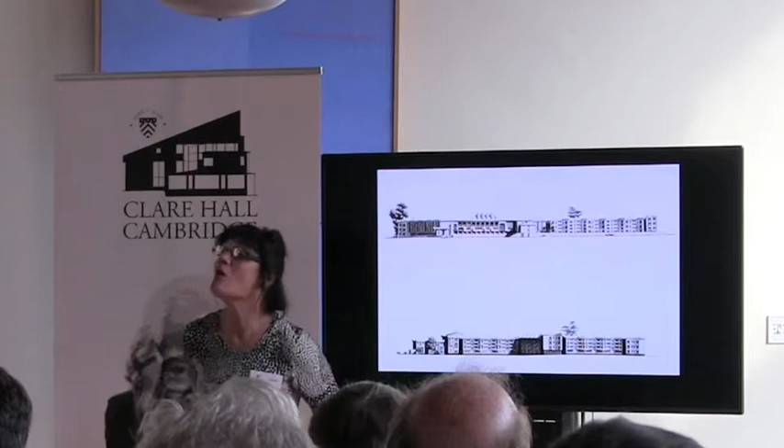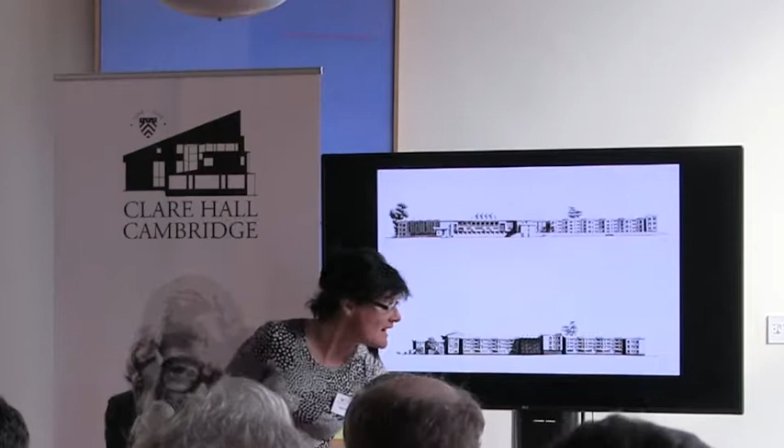This is where modern architecture starts, I think. More telling, perhaps, was the scheme that came second, by Howell, Killick, Partridge and Amis, a real success for a very young British practice, which led to them getting further work. Here's a better view of the project.

The island was supposed to have Winston Churchill's tomb on it. An ice skating pond was part of the brief, so water becomes important. This leads to work for HKPA at St Anne's in Oxford and at Birmingham, where the red brick universities were expanding very rapidly, trying to even up the balance between the provinces, London, and Oxford and Cambridge.

61-2. Other competition entrants were Chamberlin, Powell and Bon, who worked at New Hall, now Murray Edwards, and did a huge campus at Leeds that made it the biggest university of the 60s and 70s. And Denys Lasdun, who Martin later recommended to work at the University of East Anglia.

So where does that leave graduates? Moments of facts number 2 and last: the academic staff who were not fellows at Cambridge were 45% of the academic staff by 1961-2, unattached to a hall, and 916 research students unattached to a college.

The Bridges Syndicate in 1960-62 recommended building University Centre, 1964-7, by Howell, Killick, Partridge and Amis. Meanwhile, the university builds Wolfson, University College, now Wolfson College, for which you'll be pleased to know I don't have a picture. And it's so horrible.

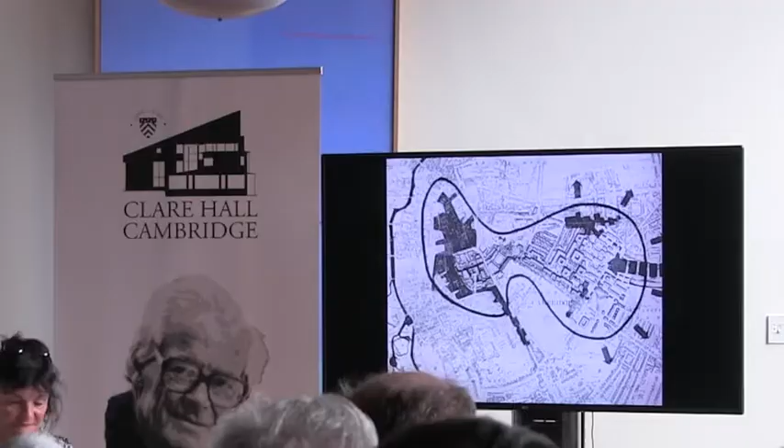Well, to begin with, a bit of necessary background. Ralph was born in 1914 in Mill Hill, a suburb of London, in a middle-class family with Scottish roots. Both his parents were Quakers, and in due order they put Ralph into a Quaker school. As you well know, Quakers have no priests. They just sit down silently praying and contemplating, whereupon one of them interprets the feeling of the meeting, and that's it. Ralph, I believe, early developed a talent for that interpreter role and practiced it during his whole life and career. Early at school, he met his future wife, Ruth.

Ralph went to Northern Polytechnics in London to study architecture, graduated in 1937, and started to work for a well-established firm. The name is forgotten, but he only found out that that wasn't his future.

So he took off to Sweden, where things in these days were happening both in architecture and in politics. He did it by bike, spring 1939. This was half a year after Mr. Chamberlain proudly had declared peace in our time after meeting Hitler in Munich. Mr. Chamberlain, as we well know, proved wrong. Ralph, with his Quaker background, contemplated joining some kind of ambulance brigade, but was, after consultation with his former teacher, advised not to, and to stay put in Sweden instead. Ruth went over by train.

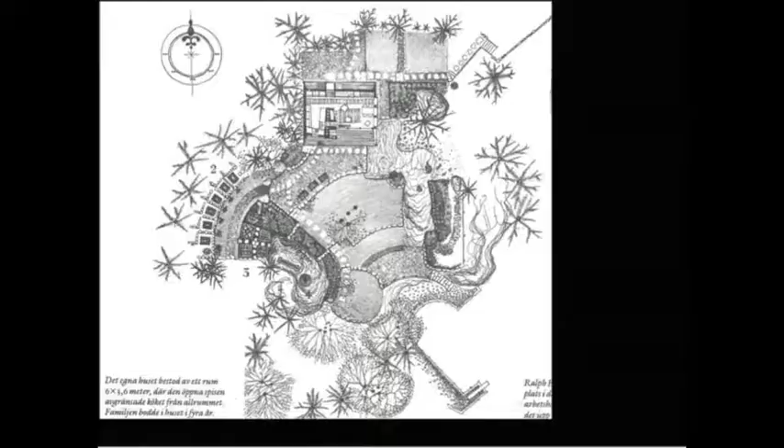Ralph went by bike or ski some kilometers through the forest to the train station, then took the train to Stockholm and the Royal Academy of Fine Arts, section architecture. There he made, for his future, very valuable contacts with both Swedish and foreign colleagues.

The original hut, named the box, is no more, but a perfect replica was built about 40 years later near his new home in Drottningholm. From that you have a view over the open fields and all the way to the medieval church and its churchyard, where Ralph and Ruth now are resting.

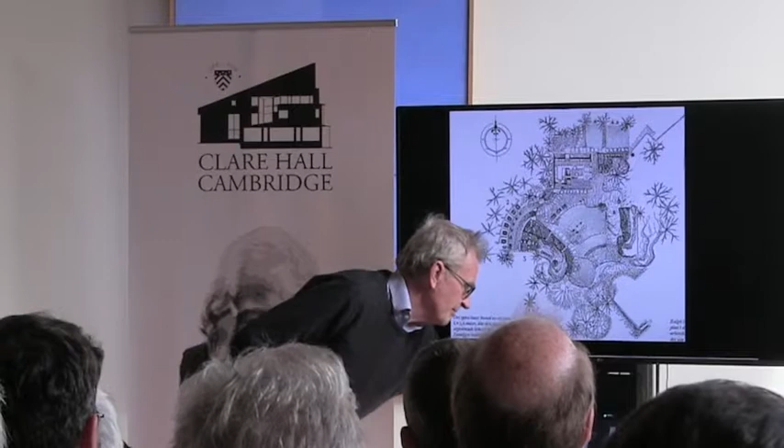It was Anders Tengbom. He remained a close friend in all of Ralph's life, and they met at the academy. He helped Ralph and Ruth to their new home in Drottningholm because the box became too cramped. They managed to rent the upper floor of a wooden house with a veranda, and there he established a small practice.

With the help of Anders, he also got his first commissions, doing some additions, doing a series of small industrial communities in mid-Sweden. He also came to design Europe's first indoor shopping centre, up in Luleå in the 50s. But there were several of these very nice projects still alive and very livable in mid-Sweden - that's the forest version.

But now the veranda wasn't big enough, which made Ralph do yet another unconventional investment. He bought Verona, a 30-meter long, 70 to 80 years old Thames barge, with flat-bottomed lee boards and 350 square meters of sails. With the help of some friends and a constantly drunk hired captain, he brought it over to Sweden.

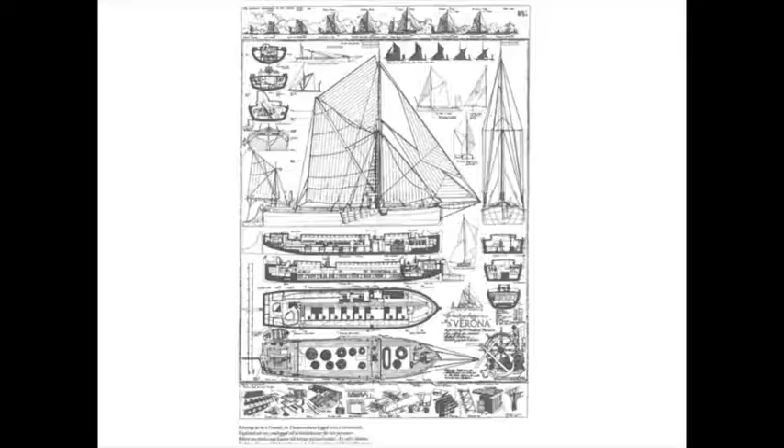He raised the hatches, opened the cargo room, and thus obtained a top-lit open space, a studio, holding some 8 drawing desks and a proper space for both secretary and tea drinking. And these are the drawings of that project. Warmed by 2 ever-whistling big paraffin heaters, and unfortunately, as it proved later, insulated by sheets of foam plastic, it became a year-round office, which, when summer arrived, with staff and families and necessary equipment and everything, sailed off into the Stockholm archipelago to return late August.

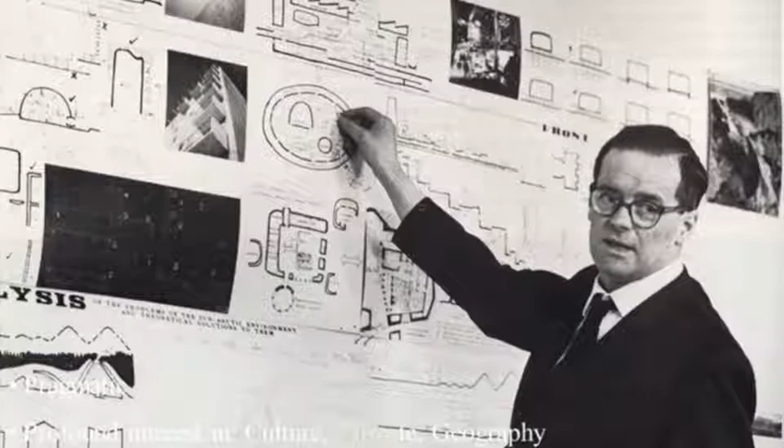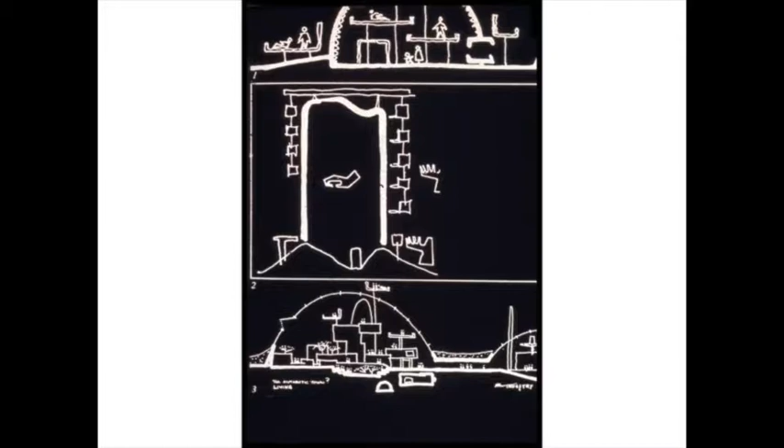He also developed close relations with radical young European architects in the informal group named CIAM. Here are examples of his studies for climatic architecture, with the hanging balconies, the unbroken exterior, etc. And if you see this picture - this is, in principle, Clare Hall. Now, of course, you don't have the snow, you have the rain.

And of course, the sun comes from the south - it does in Sweden, and when there is sun in northern Sweden and in England. So he used the slope, made a protective wall against the north, and then a dense community within, sheltered by that wall, etc.

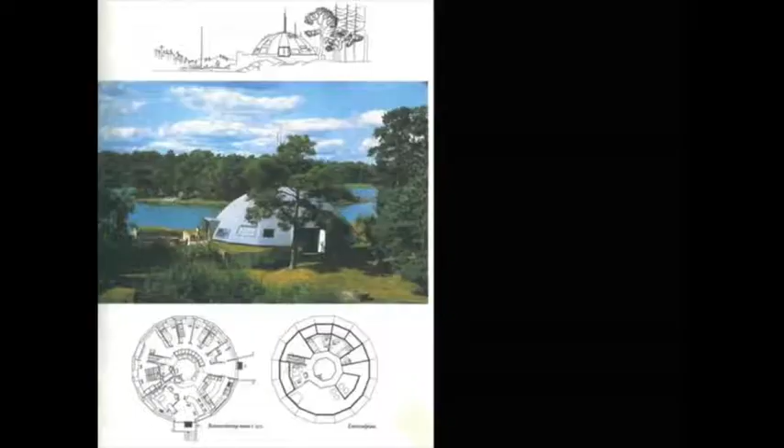That was one of his main ingredients, which he used throughout all his architecture. Here is another built example of a house with a minimum of external walls and roofs. It was very modern in this case, which is what's been talked about today.

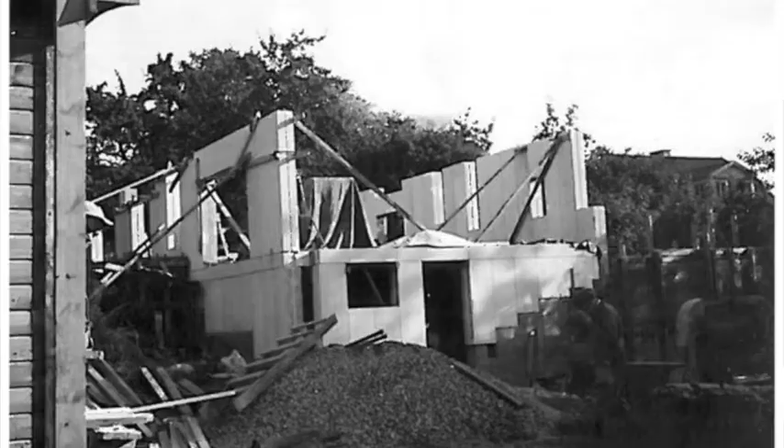With a very nice interior, curved roof, one big volume indoors. That's his desk, the center of the building. There he was controlling both work and family and everything. The open stove in the middle. The house still exists there - his granddaughter lives there now, which was a very happy solution.

Now, at last, into what became Clare Hall. It was late in the evening, early summer 1966. After my first holiday week, I joined the office at the age of 22 in the autumn of 1965. Now we are in early summer 1966, and I was returning after a holiday week.

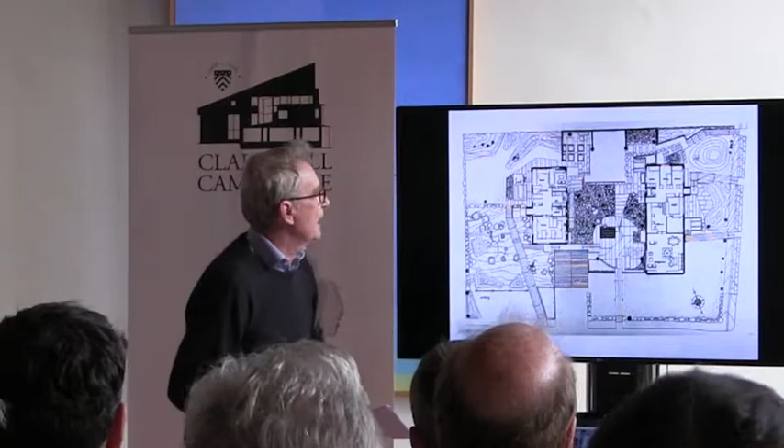The telephone rang. My then girlfriend Marianne, a student of architecture, love of my youth - we were back after a week-long study trip to the Netherlands in her mother's borrowed Austin Mini. We were staying overnight in her parents' traditional summer house in the beechwood forest close to Lund in Skåne, southern Sweden. Here is a plan of the house and another project - we were down here somewhere.

It was Michael Linnett, a keen fan of Ralph, with an RAF moustache and everything. Myself, I was a very young architect in the 60s, a decade when people were expected to be in opposition to all kinds of authorities. I worked on other projects. Ralph was at the time a bit fed up with all these people around him who said yes to everything he proposed - he found me a most welcome alternative.

Arguments were, in his opinion, good sport - after all, he was British. Well, called up in the middle of the night over the phone, I answered, 'We are coming,' implicit that I would bring my girlfriend along. So we took off: car to Lund, train to Stockholm.

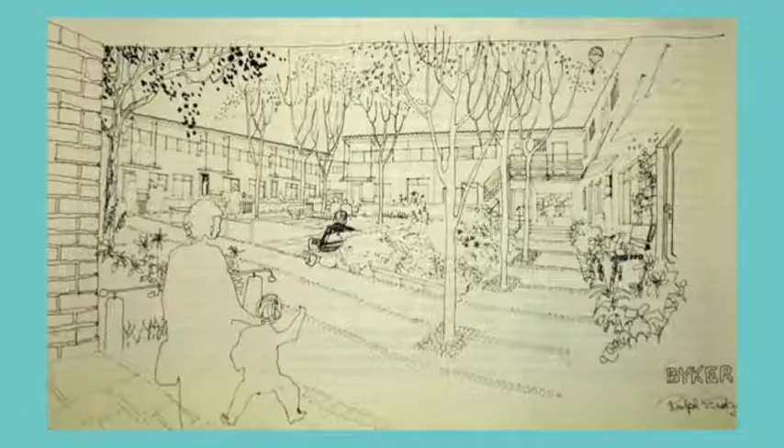Ralph was a copious drawer, and he drew in pencil primarily, some felt pen, but he drew everything. Everyone in the office was expected to draw everything - it wasn't that you left it to someone else, you would have to draw it.

If you got a good idea, he would take it off you and say, you try that one, I'll try this. He liked to interchange the ideas. But unlike many offices where the Grand Master stands at the top of the tree and hands down, with somebody doing the ceiling layouts, somebody the floor, somebody the external wall - here, you did everything.

It was a generalist office, and you learned the language of how to draw and how to express.

But here you simply see a courtyard room. We used courtyards in Byker, as in many other projects, on the flat areas of the site, because they created definition, outdoor rooms surrounded by housing. On the slopes of the site we created terraces looking one over the other, giving this extra dimension of seeing long distances from a simple two-story terrace.

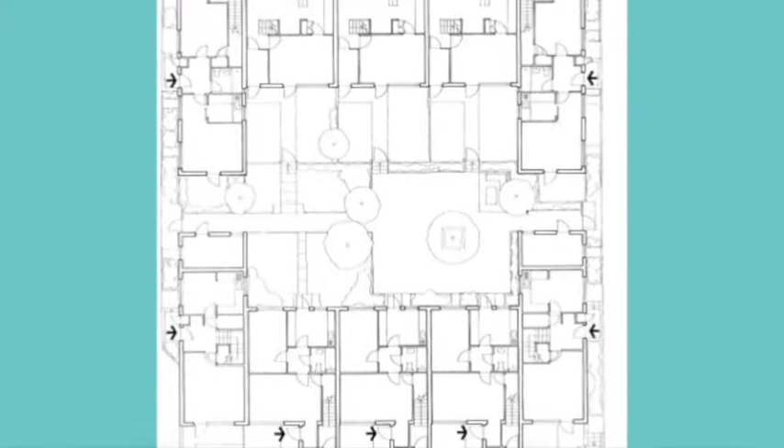So this somehow, visually, demonstrates that attitude and genius. This courtyard, one of the Kendal Street courtyards, is a very good example of how you bring buildings together in groups. Ralph, being a planner and urban designer in a very early sense, was very interested in how groups of buildings came together, how you create clement environments, warm microclimates, as he called it.

So here you have a courtyard that is protective and protected. It forms street edges, and its own semi-private, semi-public space. The public can walk through it, but it's not something you'd walk through easily - you'd feel you were treading on other people's territory, not exactly trespassing.

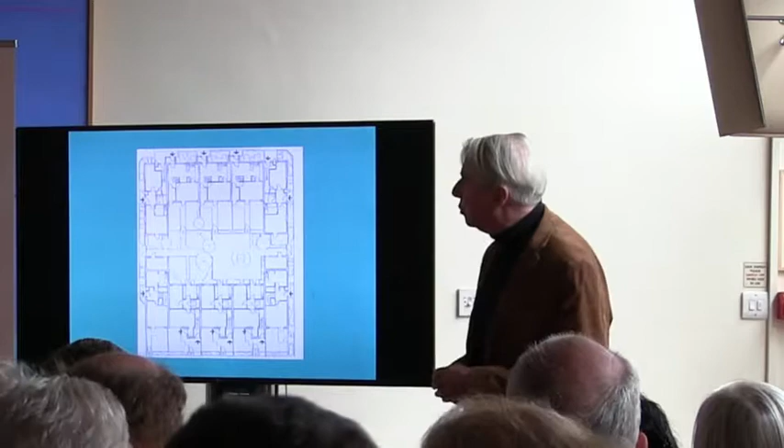Around the courtyard are 15 housing elements - houses, homes, some two-storey in the centre, others at the ends on the wings, which could be either two-storey houses, three or four-bedroom houses, or apartments. So you have this built-in flexibility.

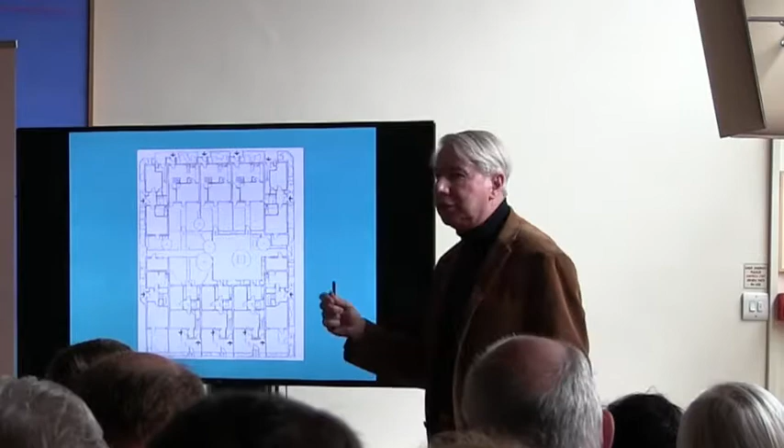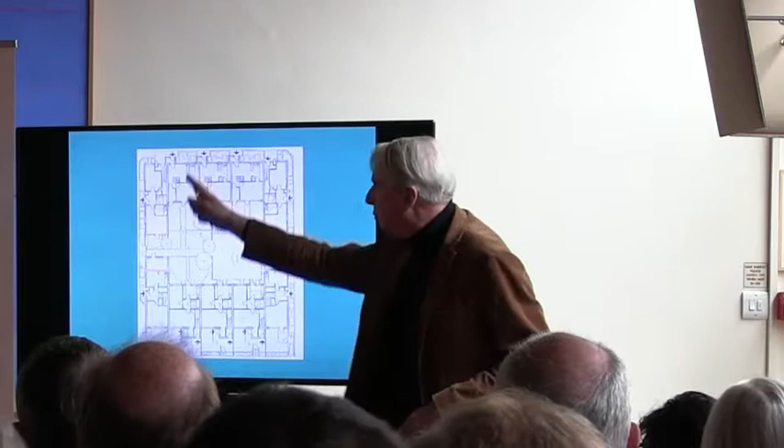Ralph often spoke against monumentalism, which couldn't be adapted. He wanted to create an architecture that could adapt with change, that people could change themselves. As we know in society today, different demographics require housing to be divided or used differently because of different types of families. These end pieces could be family houses, or houses for smaller families, couples, individuals - it was adaptable.

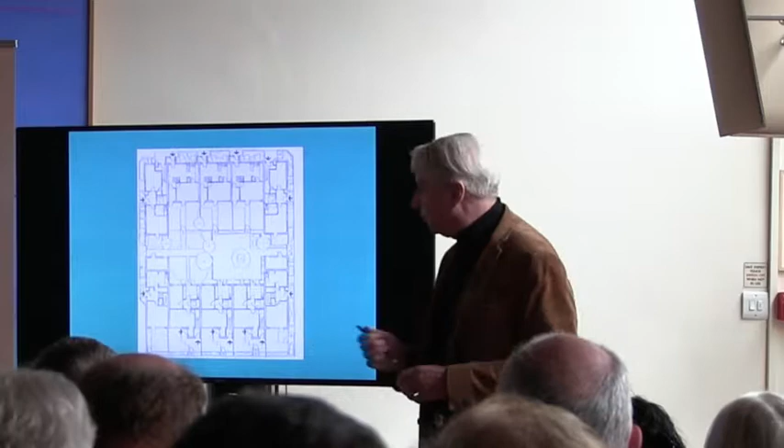On the street edge, forming the edge with gentle levels allowing you to come in, taking doorsteps, people actually started planting roses and climbers, which Ralph and the whole team loved. He expected all architects to know a great deal about landscape architecture. He didn't see professions as separate - he felt you should know about the other profession and they should know about architecture. It was a very open-ended approach and way of working.

When we got to the terraces, we moved away from courtyards onto the slope. These slope houses were set on a 1 in 7, 1 in 8, sometimes 1 in 6 slope, but gave them the ability to be entered at half level. They had, in many ways, their own courtyard lanes because of the fencing, which was part of the architecture - for me this was very interesting.